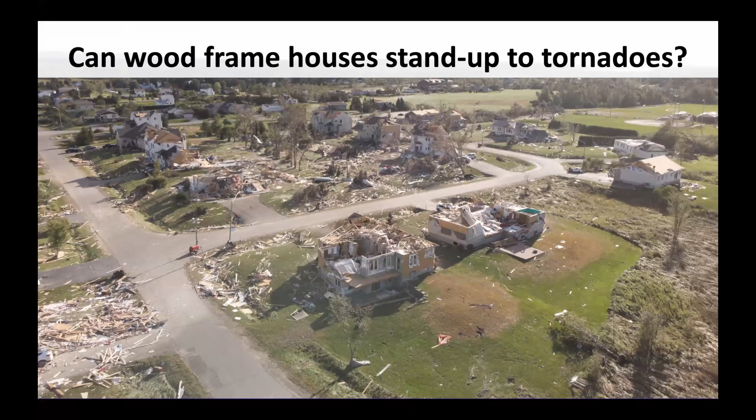So I'm going to talk about the vulnerability of houses to extreme winds and tornadoes. And to do that, I'm going to talk first about the EF scale. So tornadoes are rated by the damage that they cause. The wind speeds in tornadoes are seldom measured. We have radar systems in place, but they have volumes that are too large to measure wind speeds. So you really have to be chasing storms with things like radar to capture wind speeds. And even then, it's very difficult to get wind speeds down below 10 meters where houses are.

And so for a long time, we've been rating the wind speeds and the intensity of the tornadoes by the damage that they cause. And so we have the EF scale. EF0 is at the onset of damage. You get very minor damage. It starts at around 90 kilometers an hour, gust speeds. And this might take your eaves troughs off, might take a few shingles off, throw lawn furniture and trampolines around and things like that.

And then at the most extreme end, the biggest and most devastating kind of tornadoes are rated EF5, and those are estimated to have wind speeds above 315 kilometers an hour. Although one hesitates to have three significant digits in that number because, again, these are estimates and not direct measurements. But the damage caused is observable and can be categorized from light damage through moderate damage to severe and incredible. And so that's what the ratings are really based on.

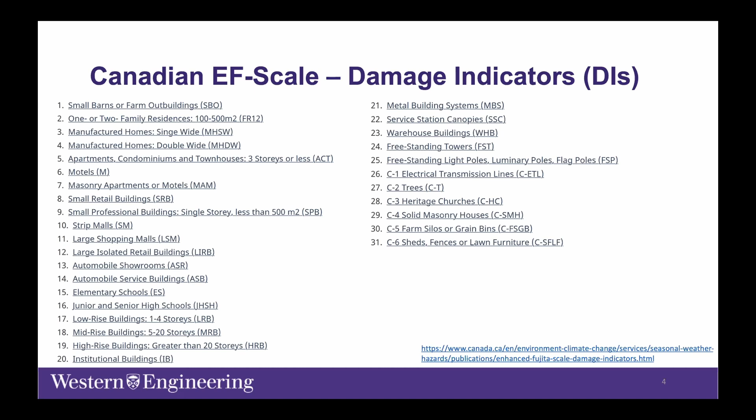So in Canada, we have the enhanced Fujita scale. We have 31 indicators, and one of them is wood frame houses, but we use all sorts of structures to rate damage, including forests and trees, and basically every kind of structure you can imagine to help us estimate the intensity of the tornado damage. And if the tornado hits nothing, if it's just going over an open field, the rating is EFU by default because nothing was hit. So it's important to keep that in mind. Of course, today we want to talk about wood frame houses, and the EF scale is very helpful in helping us understand the damage that's caused.

So there's 10 degrees of damage, starting at the threshold of visible damage. Again, these are things like your eaves troughs and shingles coming off, through to degree of damage 10, which is the complete destruction of a house, and the slab swept clean. So literally everything is blown away, and all you have is a concrete base remaining at the end. And in between, there's a gradual increase in the damage levels and the wind speeds associated with it.

Now, these wind speeds associated with the tornado, again, come from engineering assessment of that damage. And the one that's being studied perhaps the most, because it's really of critical importance, is DOD6, when large sections of the roof are removed. And that's being well analyzed.

And so these wind speeds are established, and the expected value, kind of a median value or an average value expected for lifting a roof off of a house, is around 195 kilometers an hour. If there's missing fasteners or some other inadequacy, we would rate it at a lower wind speed. And if there's some enhancements or things like a hip roof that make a house stronger, we have an increased speed. And so that's how tornadoes are rated.

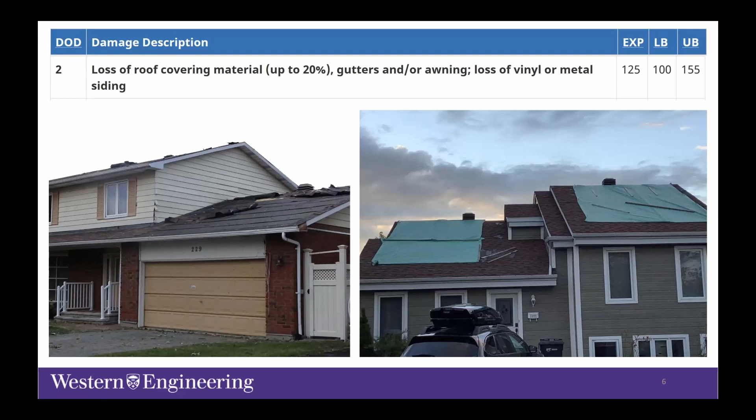What I want to do is talk a little bit about the vulnerability to houses and help you understand what the particular issues are. So when the wind blows over a house, it creates pressure. So we were talking about the degrees of damage at DOD2. Again, we have the uplift on the roof. At these lower wind speeds, you start to get the onset of damage. Shingles come off. You see vinyl siding. You see so much vinyl siding in a windstorm, our eyes actually start to ignore it because it's everywhere. It just comes off at very low wind speeds. And so that's DOD2.

As the wind in the tornado increases, of course, there's more damage caused, and the next level of damage is really the loss of the roof decking. So the roof is really the most vulnerable part of a house, and we need to hold things down. The shingles are gone, and then sheathing is off. You can see that in these images. The other part that you're seeing here, in addition to the roof sheathing being off, is a lot of windborne debris. Windborne debris is a really big issue in all windstorms, but it's a particularly large issue in tornadoes. When a shingle leaves the roof and there's enough wind for it to fly, it has enough energy to break window glass. And so you start to get a lot of secondary damage once the roofing starts to fail.

Sheathing panels will travel at close to the gust wind speed that caused their failure. So if you have winds of 120, 130 kilometers an hour, sheathing can travel at those kind of speeds. So you can see that would be both quite frightening, but also very damaging. And so holding these things in place becomes really important.

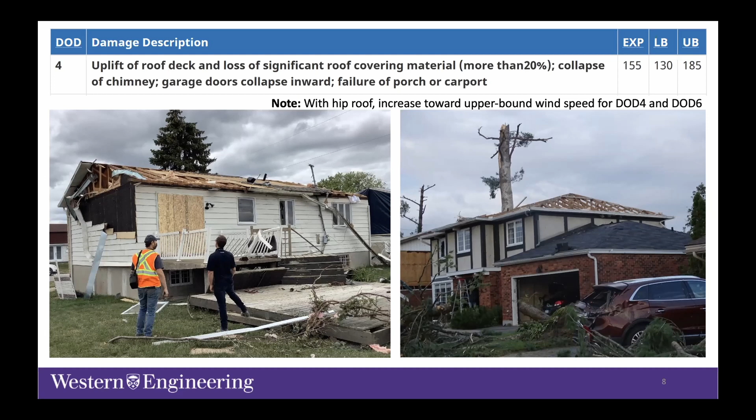The next level of damage is DOD6. This is when the whole roof comes off. There's been quite a lot of analysis of this because it's a critical failure. At this point, the houses are usually condemned and have to be rebuilt, usually from the ground up. So the loss at this stage is really 100% for these kind of properties. Below this kind of level, repairs can happen. So this is where we really want to focus. As I said earlier, this wind speed is in the EF2 range, and 95% of the tornadoes are in that range. So this is what we really want to focus on, because this is where the major damage is caused.

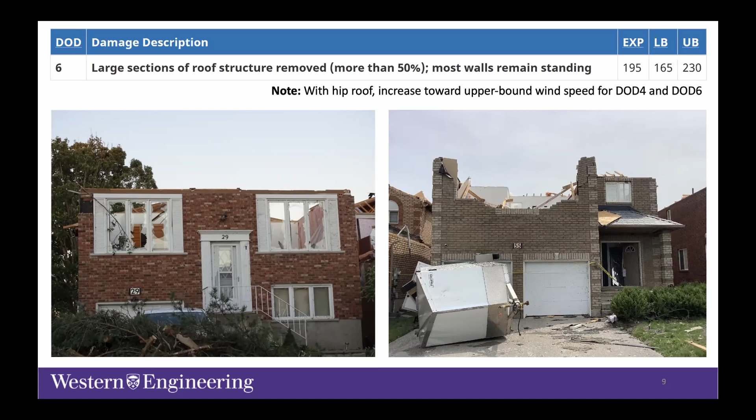If you look at these images too, again, I talked about the debris breaking windows. You can see in the image on the left, all the windows are broken. In the image on the right, there was a window above the garage, and that's gone, and the whole roof is gone. What usually happens is you get a debris impact, the wind rushes into that space, and it causes a positive pressure. It's like a balloon blowing up inside your house, and that gets combined with the aerodynamic pressures on the outer surface that want to lift the roof, and these act together to push the roof up and over. And so this is one of the major things that we want to mitigate.

Rob and Michael are going to talk about some resilience measures, but really the short answer is putting in hurricane straps can help withstand this right up to this kind of level of wind speed to mitigate the damage. Garage doors are also critical. The broken windows, of course, cause internal pressures, but garages also cause damage.

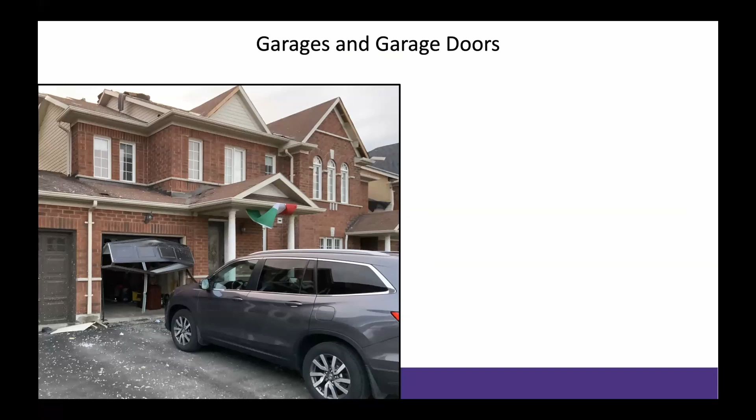This is an image from Barrie where a garage door got sucked out. And that doesn't add to the vulnerability of the roof. It is an interesting photo. The more serious case is when the garage door blows in or gets hit by debris, and this pressurizes the space. In this particular case, we had 2 stories and internal drywall, so it didn't push the roof off. The damage above this house was caused by the failure of both the roof and then upper walls. And the sidewall, in this case, blew out because of the garage door failure.

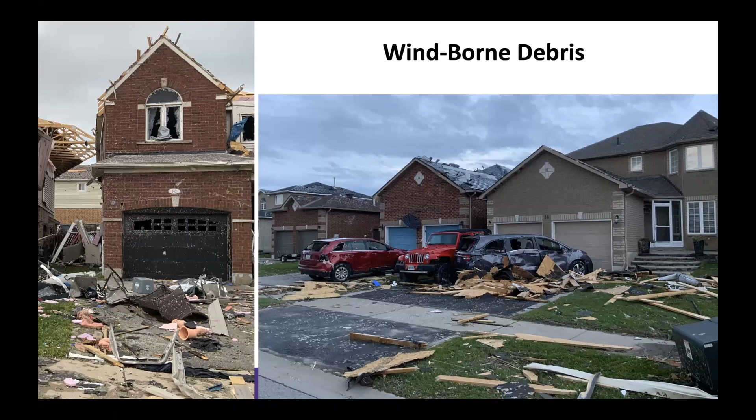So debris, again, I want to emphasize that is really an important point. So holding as much of the structure together to reduce the debris field is really a significant issue. And once you start losing complete roofs at DOD 6, that is when you start to see a lot of damage in adjacent structures and a real mess after the storm.

At the next level, once the roof fails, the walls are very vulnerable and they can collapse. And so this is the next level of damage. It takes a bit more wind speed to do that. So it's actually a higher wind speed at DOD 7, but that's where this house on the left occurred. The house on the right was from Dunrobin, and here the first floor collapsed. There was a second floor. There's a lot of wall damage again, so this was categorized as degree of damage 7 with the wall collapses.

And again, lots of details here on how to hold the houses together. We see lots of different things with how houses are put together, but if we have wall sheathing, it really helps with this vertical load path that we talk about. So the wind wants to lift the roof up, and we want to hold it down by having proper fasteners, but we need to take that load then all the way down to the foundation, and sheathing can really help with that by holding the first story to the second story and the first story to the foundation.

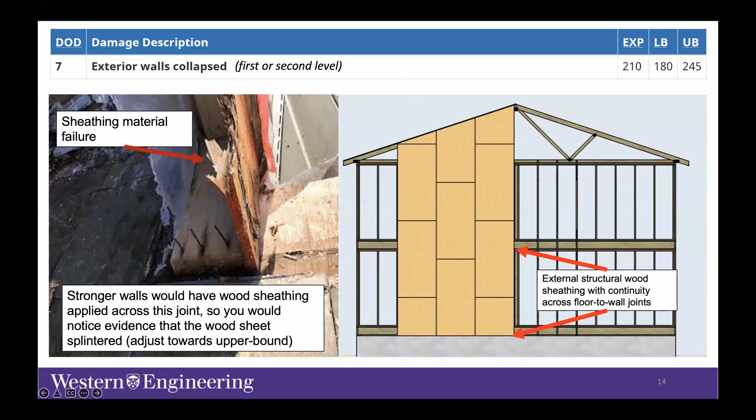And here you see a case of broken lumber on the left because it was properly fastened there. There was some wall failure there that you can see, but this is definitely making a house stronger and holding it together. So again, little details matter here.

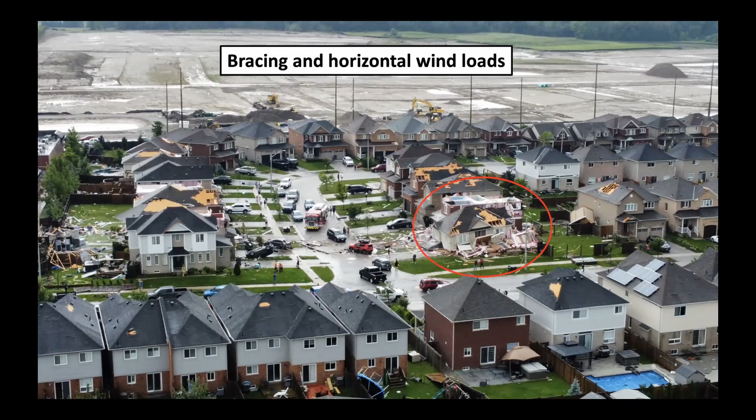I want to talk about one particular case in Barrie that was quite interesting to us. It was this house in the middle that collapsed. So we see out of sequence failures here. You can see there's shingles off. There's a couple of sheathing panels off, and then it looks like it's just sitting there off its foundation, but it was a 2-story house. It looked like this, and the first story collapsed. And so this is kind of an unusual failure for us, and we think it's something that needs to be addressed in modern building codes.

So this form of construction had lots of insulation, but no sheathing, and the bracing wasn't sufficient to hold it over. And so you get an out of sequence failure of the walls collapsing before the roof comes off. And so that tells us we have a weak spot there that we need to think about in terms of mitigating damage. So this is the kind of exception to thinking about holding the roof down. We also need to make sure that we don't lose sight of enough bracing to hold it together.

Finally, at degree of damage 10, this is when the house is completely destroyed and the wind is strong enough it blows everything away. What holds your house down here is anchor bolts with a washer and nut, and when that's done, your house is very strong, and this is really good for up to EF2, probably EF3 tornadoes. But at EF5, it just overwhelms the structure and can cause it to fail.

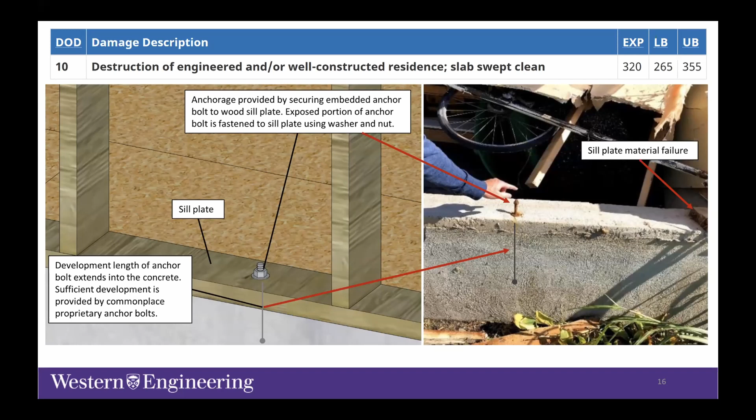So this is one of the things that we look for in these surveys. In these two cases, these are degree of damage 10. The house is completely blown away. The house on the left was from the Alonsa EF4 rated tornado.

But there were places here where the foundation bolts were very weak, and we had joists just sitting on concrete. On the right, you can see some nails into concrete. That's a pretty poor fastening method rather than having embedded bolts. At this level of destruction, at this level of wind speed, we're not suggesting that we design for that, but the little details do matter, and they can help hold things in place for longer and provide more safety.

So just again, to end my part of this talk, 95% of all tornadoes are roughly EF2 or less, and we can do things about that kind of damage. At this level of intensity of tornado, we have degree of damage 6, which is really about the roof failing. And so making sure that we hold the roof on is the major structural action that we can do. Putting things in place to reduce the windborne debris field as well.

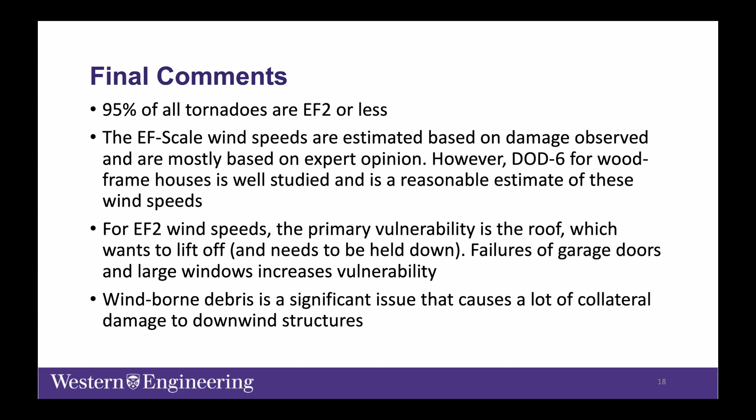So keeping the sheathing on, keeping the shingles on, we can all reduce that kind of damage by taking things out of the debris wind field. And so I'll stop with that and let my colleagues take over.

Okay, so my portion of the presentation is going to follow on what Greg has said, and it really talks about the experience we had in Barrie and what we're trying to do about it so that we can make these houses more resilient. So just a bit of an agenda: slight introduction, what exactly happened in Barrie, what is the problem, how do we think we can solve that problem, and then how can we change the code specifically to deal with those issues.

So just quickly, a little bit about myself. I'm the Chief Building Official for the City of Barrie. I've been a structural engineer since 1987. I've worked in both private consulting and the public sector. I've had some involvement in some technical committees, and I know some of these people through some of those committees. And I previously chaired building code committees, the structure advisory committee, or building code interpretation committee. So most of my career has been related to building code stuff, but specifically with the view of the structural requirements.

So on July the 15th, an EF2 tornado hit Barrie. I have never experienced a tornado before, and I can tell you it was quite overwhelming. I remember I was sitting at home, and some of my staff, some of the building inspectors were in the area, and they said, "Michael, we think there's something going on here." And they sent me a couple of pictures, and I thought, oh, well, that doesn't look too bad. And then they sent me a few more pictures, and then I made my way to the site, and it was actually completely overwhelming. Not only the amount of destruction and the amount of roofs that were ripped off was incredible, but also the amount of debris.

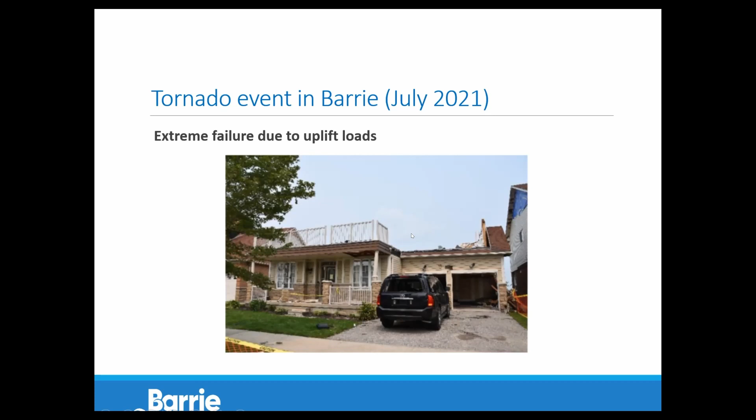So this is one example of what we saw in Barrie. This is one of the worst houses that was hit. This used to be a 2-story house with a roof. So not only was the roof ripped off, the entire second floor was ripped off. We did issue an unsafe order and a demolition permit for this house, and it's being completely rebuilt. So this would be an example of what I would call uplift loads. Anytime the roof is getting ripped off, obviously something is pulling up on it, and those are some of the forces created by the tornado. And that's probably the most common type of damage that we saw during the tornado.

It's not coincidental that this house is on a corner lot. Most houses on corner lots have more windows in the sidewalls that face the street than houses that are not on corner lots. And there's a reason for that in the building code. It's called spatial separation. So the building code limits the amount of openings you can have in a building in case there's a fire and they want to prevent fire spreading to an adjacent property. In the case of a corner lot where there is no adjacent property, you can take advantage of that and have far more windows. What that does, though, is it eliminates portions of wall that help stabilize the building.

So in this case, Greg had also suggested that there was no sheathing on this house. They had used insulation on the outside and no sheathing, but they did have some bracing, and the code does permit you to do that. So that was certainly a significant contributing factor. But the other reason is because it had a lot of windows and it just didn't have enough wall remaining to be able to stand up. And in this case, the wind pushed the house over rather than lifting it. Or there was probably a combination of those loads as well.

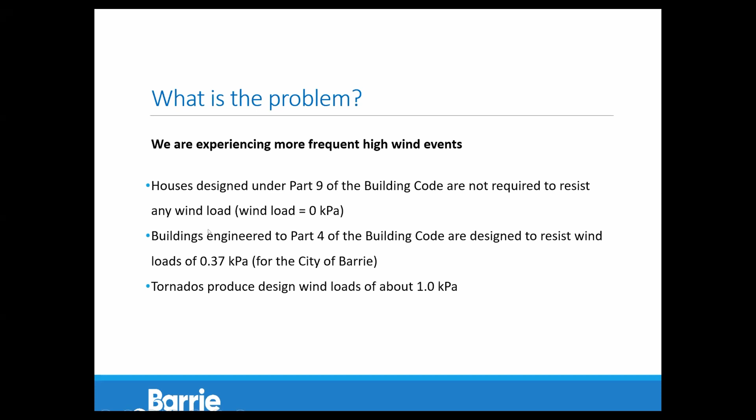Now, the actual loads from our tornado are higher than this because we apply all kinds of pressure coefficients due to the geometry of the house. There's higher loads in corners, there's higher loads at overhangs, but the base load for comparison purposes is 1 kPa. So this is why we have a problem.

We are experiencing more frequent high wind events. This tornado in Barrie was in July, and there was a tornado in Barrie previous to that. It was 36 years ago. But there are many, many tornadoes occurring in Ontario. So the design loads, that 0.37 kPa that I showed you on the previous slide, represents a load with a 1 in 50 year return period. That means that load should only be exceeded once every 50 years. Yet last year in Ontario, there were 60 tornadoes. They weren't all EF2 tornadoes, but a tornado will significantly exceed those loading requirements.

So the real question here is, does the code need to reassess the wind loads for which buildings are designed? So Part 9, which is prescriptive, has historically worked fairly well, but as we see more high wind events, really this is the most important question that we have to address.

So what is the solution? Greg has studied tornadoes, so we understand and can quantify the loads that are created by tornadoes. And we can certainly design buildings to resist those loads. So once we know that a tornado creates a load of 1 kPa, it's easy for structural engineers to take those loads and design the buildings. So what we need to do is we need to change the framework of the code to design buildings for these higher winds.

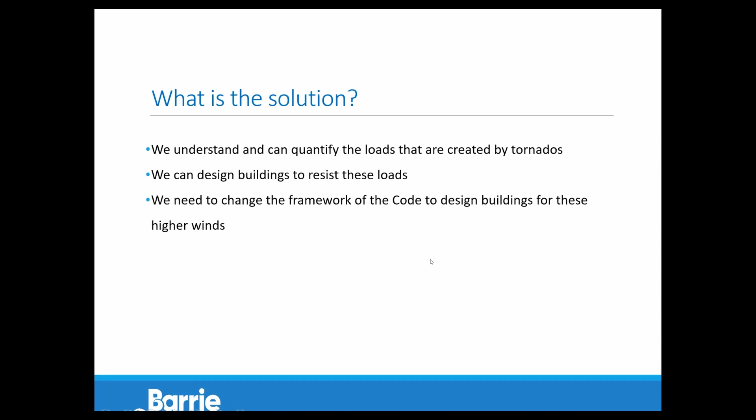So as I said previously, houses are currently designed under Part 9 of the Building Code, which is a prescriptive standard. So it's exactly like a cookbook. Just do what it says and your building will comply with the code. Although there are no wind load requirements, buildings are deemed to be structurally compliant with the code. And again, Part 9 is based on successful past performance, but not performance against these high wind events. So as these high wind events increase, can we continue to rely on the past performance of Part 9?

We can create prescriptive solutions within Part 9 to withstand the higher loading requirements created by the high wind events. So we could change all the wind loads. We could say that every house has to be engineered, or we could say, we know how much load there is in these high wind events, and we can prescribe solutions and put them in Part 9 so that they can be incorporated into residential house construction. And that's what I have proposed to the province.

So this is not a technical presentation; I'm going to go over on a very high level the specific things that I've suggested for code change proposals. So one main concept is the concept of a continuous load path. As we see the roofs ripped off in the tornadoes, Greg mentioned the critical joint between the roof and the wall, and that is probably the most critical joint, but there are many other joints that uplift load. So if someone's trying to rip your roof off, those loads have to be transferred all the way down to the foundation of the building. So we want to do that by identifying a continuous load path. So one of the things I've suggested is to provide clarity that buildings must have a continuous load path from the roof to the foundation to resist uplift loads.

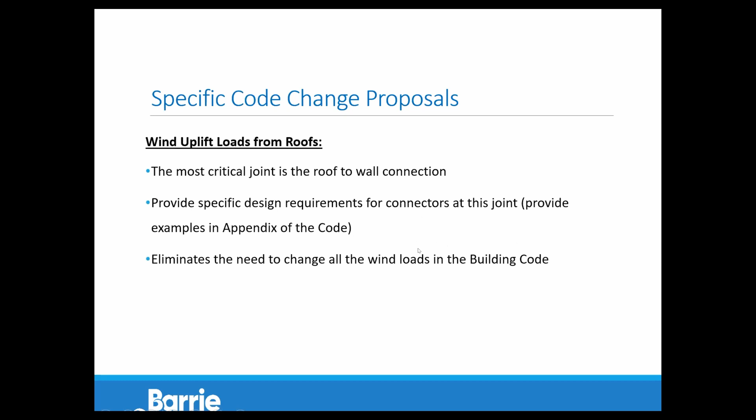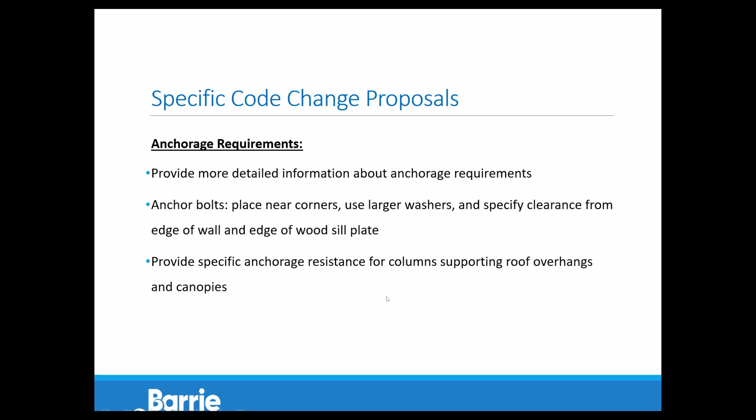And that's it. So really high level, just the continuous load path. Let's look at that most critical joint. Let's focus on the sheathing placement and the connections and make sure we anchor our walls into our foundations. And Robert, I guess I'll pass it to you.

Good. All right. Well, thank you, Michael and Greg. So I'm the third speaker here in this panel, the third and last. And my job today is to describe a soon to be published CSA standard S520.

And the dilemma I had was that I was not allowed yet to show images or specifics from the standard. So I felt a little handcuffed there, but I'm going to explain the standard anyways, but I'm going to do it in a maybe more pictorial way by showing images from my experience in Dunrobin, which was a tornado that happened in 2018. And I've updated it with a few images just recently near my house from the derecho that happened last week.

So the standard that I'm going to be describing is called CSA S520. It's going to be published in July, and the full name of that is Design and Construction of Low-Rise Residential and Small Buildings to Resist High Wind. It's a nice long name. And Greg and others at ICLR were involved in this standard as well.

So my experience from the Dunrobin tornado, it was mostly an EF2. There were pockets, I understand from Greg and his team, of EF3 level tornadoes. And I had the opportunity to walk through those houses with the City of Ottawa, very fortunate to be able to do that in September 2018.

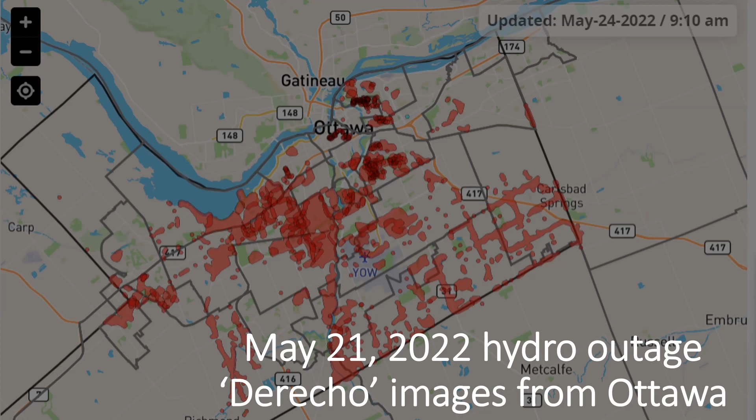And as of today, some of the major roads in Ottawa still have hydro poles lying on the road. And I'm happy, though, to report that my power was restored finally this morning at 1:30, just in time for this presentation after about 128 hours without power.

And this is what it looked like just outside the window behind me, less than a kilometer away. This is what happened. And I don't have the experience that Greg has of looking at all these observations, but it perplexed me to see things like this left-hand image where what's typically a flimsy sign is standing stoically there beside much stronger structures, the hydro pole and the traffic light system.

They're both out. Of course, it all depends on the wind direction, and that sign was probably in the perfect position to let the wind pass it by, but the other ones were not. I'm not going to talk too much about that. That was just a little update, and I have a few more derecho images that illustrate points. But my main goal today is to really describe this new standard S520 and to illustrate 10 points about how to build wind resilient buildings using this standard.

This standard, as Michael alluded to, is based on EF2 tornadoes. And as Greg mentioned, EF2 tornadoes are what the majority of tornadoes are in Canada and the US, 95% of them. And those represent wind speeds of around 180 to 220 kilometers per hour. But before you tune out on why we would want to apply this to wood frame buildings, the principles in the S520 do apply to lower wind speeds as well. So that's the beauty of this. And really, I treat this standard as a standard of how to increase the resiliency of wood frame homes.

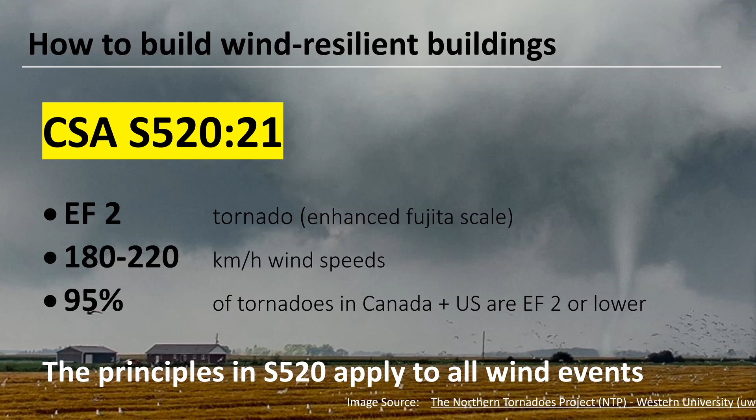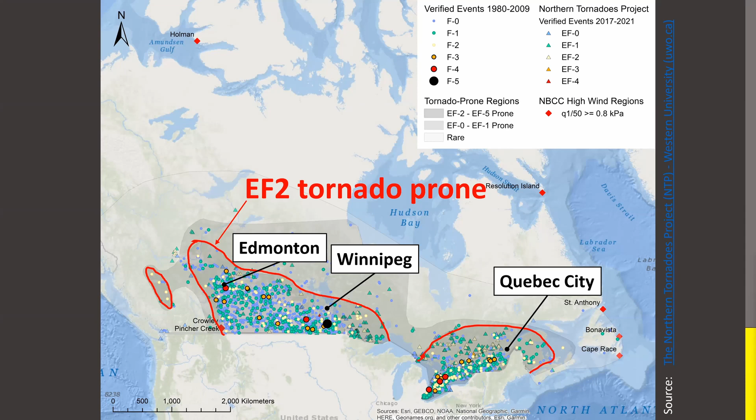Also, a map from Greg and his team at the Northern Tornadoes Project. The city descriptions and the red lines are mine, but those are showing the EF2 tornado prone areas. And so when we think we're not going to get EF2 tornadoes in our area, well, we certainly can. And you can see how far north tornadoes of this magnitude are. So now we'll get into the 10 features of the standard and how we can apply that to building.

One of the most important principles included in the CSA standard is attaching the roof sheathing really well. Of course, if that roof sheathing is gone, you're in trouble. And Greg already illustrated that once the roof sheathing is gone, everything becomes more susceptible. The standard will describe wind pressures, which I can't specify now, but I can say that the roof edges and corners, projections, experience the highest wind pressures. And so the standard addresses that.

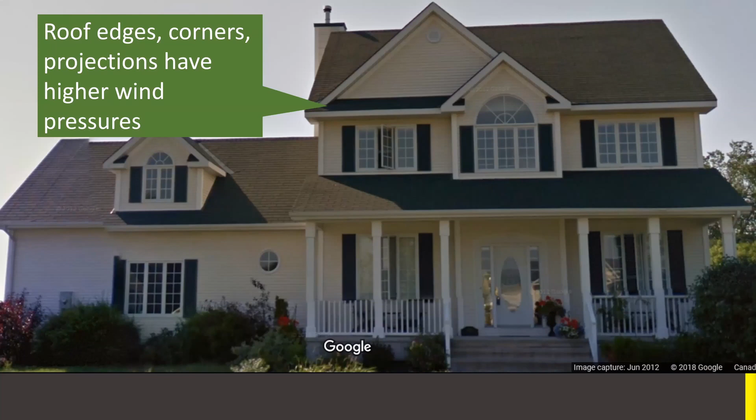So the good news is back in 2018 in the US, the wind resistance values went up, and they introduced a new nail called the roof sheathing ring shank nail. And this nail hopefully will make it into Canada to be more commonly available.

This nail is important because it acts like a screw with its holding power, but it's driven in like a nail. And so now the failure doesn't become that nail pulling out, but it actually becomes the sheathing popping around the head. And we call that head pull through governing the design. So that's the beauty of this nail.

And so the standard will have tables about how to fasten your roof sheathing with this type of nail, but also common nails. And so the advantage will be you could use less of these types of nails than common nails. So that's principle number one, feature number one.

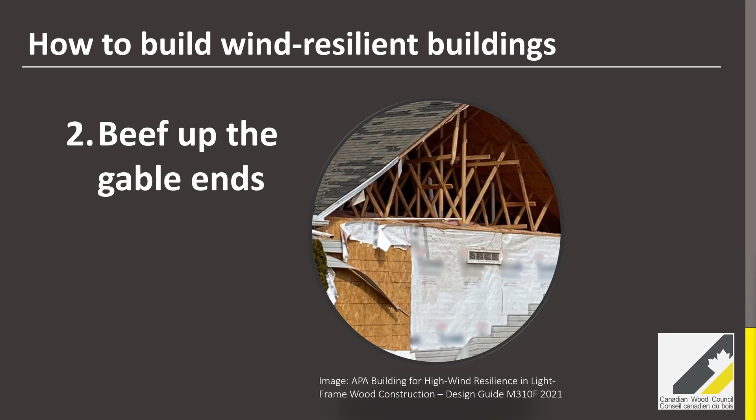Two, beefing up the gable ends. The standard talks about this extensively because this is a known issue. Typically what you'll see on a wind site after the wind event goes through, you'll see damage to gable ends. There are high winds up there, no doubt, but often they're less structurally sheathed. They're not going to have gypsum wallboard on the inside. They may have less fastening. And so for a number of reasons, they're susceptible.

And so the standard will describe methods of more strongly attaching the studs and the overhangs to resist those wind loads. Also, Greg or Michael pointed out, I forget who, that hip roofs perform better than gable roofs. So one way to prevent the gable roof failure is to build a hip roof.

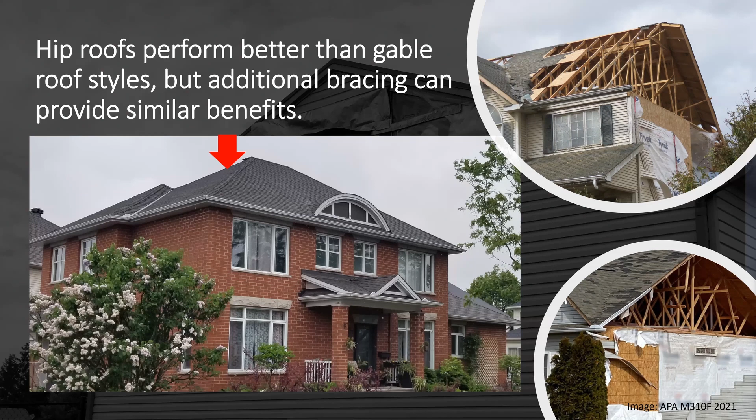This is my neighbor across the street's house. And so that makes me happy because at least I won't have chunks of their roof flying at my house, at least based on their roof structure.

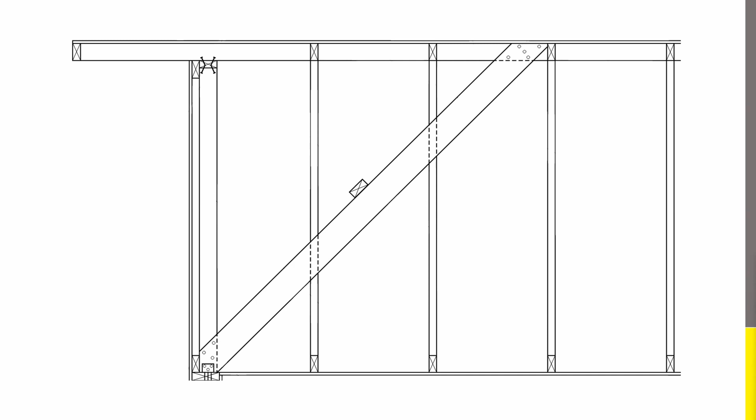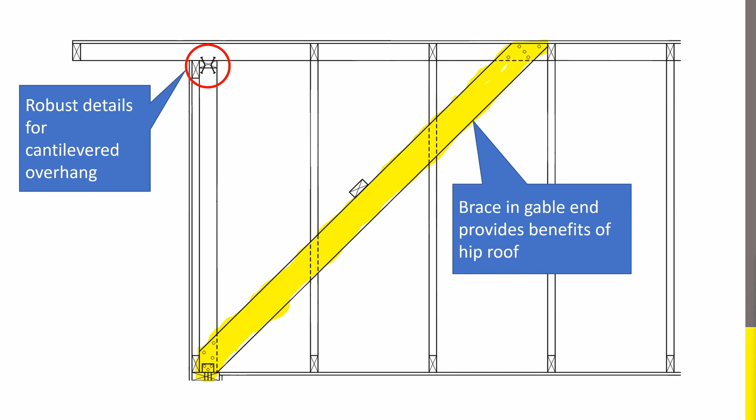The standard addresses that, knowing, of course, that not everybody can build hip roofs, but it kind of mimics it by adding these diagonal members in your gable end, if you do have a gable end, and it'll describe in a lot of detail the spacing of these proposed braces, the attachment of them on the bottom and the top, as well as robust detailing for the overhang at the top and the connections at the bottom for those gable end studs.

So that's a very practical and useful aspect of the S520 standard that you can look forward to reading about in July when it's published or earlier.

Principle number 3 is connecting the upper roof framing and components to the lower framing more robustly. And so this includes things like piggyback trusses. That's a case where you have a tall truss and you have what they call in the industry a cap frame that attaches to a lower frame. And the connection of that is detailed in the standard.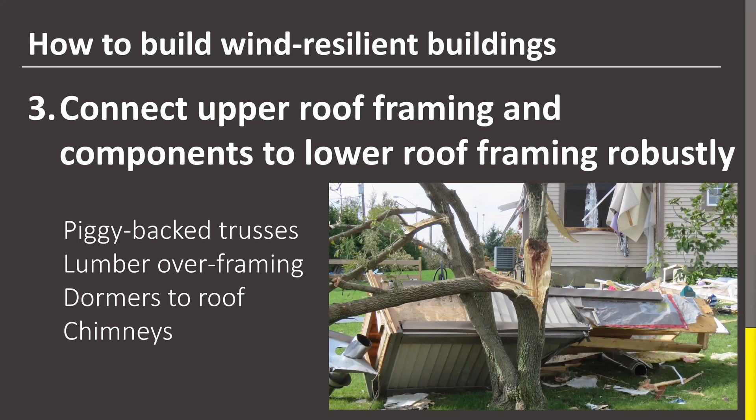Also the connection of lumber over framing, things like crickets or other aspects of your roof, little pieces of dormers or dormers themselves and chimneys, all of those should be connected more strongly. Here's an example of a chimney in the Dunrobin storm that used to be on that house in the background, but is not anymore.

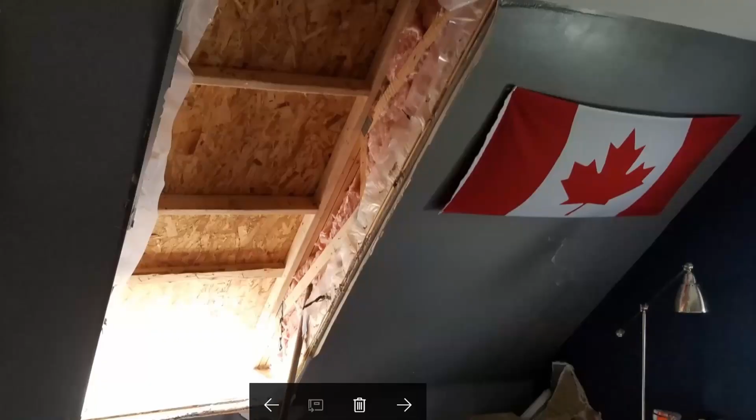And here's an example of a dormer that blew away, and they just put some temporary sheeting over top of it to prevent further damage. Here's a case where the dormer is now located where the car used to be. So the standard does point out that you need to attach these types of features more strongly.

Okay, so now I'm on point 4, feature 4 of 10 features of how to build wind resilient buildings. And so the fourth one is ensuring that, just like we want to ensure the roof sheathing is adequately attached, we want to ensure the wall sheathing is adequately attached for suction in this particular case.

And just like with roofs, where the corners and edges and ridge have higher wind pressures, similarly with bump outs and corners of walls. And so this is a house near my house, a result of the derecho that happened last week. And you can see the corner there was the only part of the wall that was damaged. And that's more than likely because there was just a little bit increased wind pressure at that area.

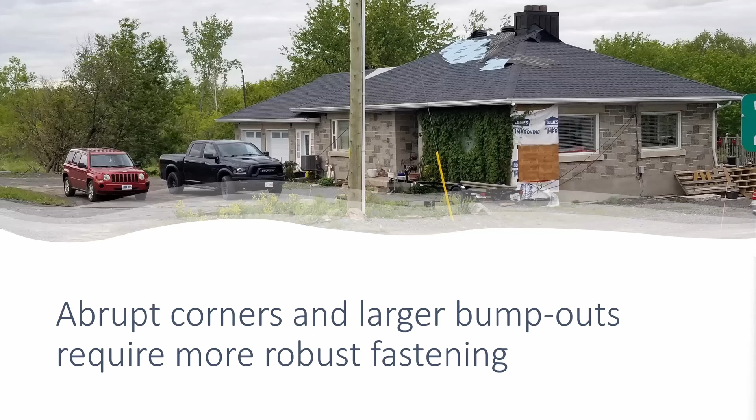The Rideau River is right behind that house, but the wind came from the front of the house towards the back, towards the river. So it wasn't a river effect.

Principle number 5: both Greg and Michael pointed out the racking, the lack of sheathing to prevent lateral movement. And here's an obvious case where the building racked. There's a few of them here in Ottawa that have racked as well.

The standard S520, instead of duplicating what the National Building Code requires for lateral movement or lateral resistance, refers to Part 9 of the National Building Code. I've been involved in that for about a decade. Although the provisions are in there now, they're going to be even more improved in the 2025 National Building Code. I realize the 2020 was just published. We didn't quite make it in there, but still, using and referring to Part 9 to make sure that you can comply with at least that is useful.

And those of you in Ontario, you'll see there is not a specific section as there is in the National Building Code for this. So you'd have to look at the National Building Code 9.23.13 for how to resist lateral loads. And remember that the 2020 National Building Code, just published in March of 2022, is now freely available on the Codes Canada website. So you can take a look at that and see what I'm talking about in more detail.

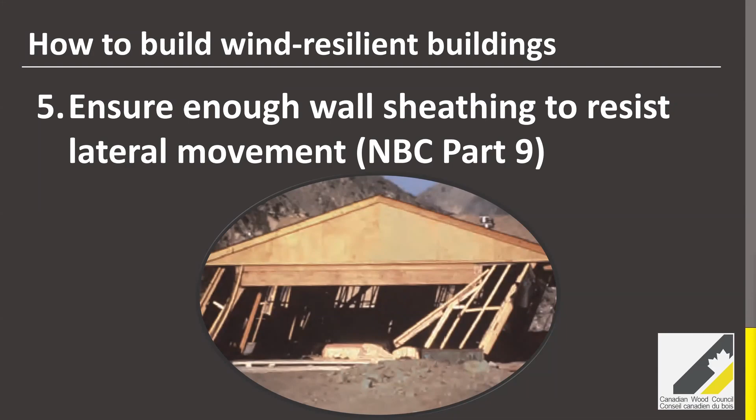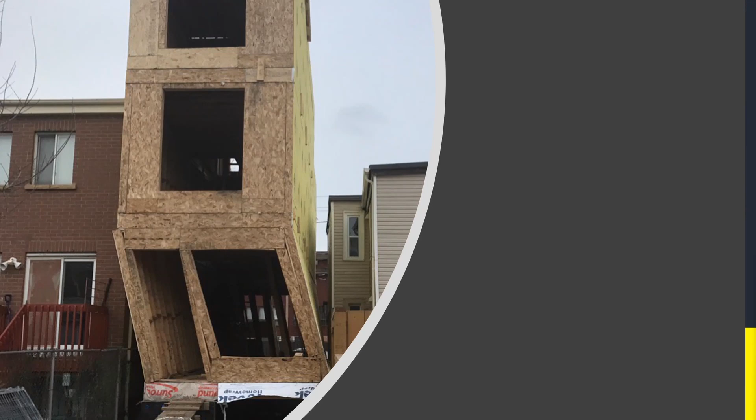So again, you need good sheathing, but you also need enough sheathing to resist those types of lateral loads. And this one, granted, it was during construction. Obviously, there's not enough wind resisting walls in that direction. Fortunately, the brown brick house beside it propped this one up until they could take it down. So we need enough sheathing for these types of houses.

Now, I recognize some people are a little concerned about mixing sheathing and continuous insulation, because we also have to consider the energy code these days and the demand for continuous insulation, but they do work well together. Some builders are using both, and some are just swapping out the wood sheathing, relying on the gypsum wallboard and putting in continuous insulation. But we highly recommend using the wood sheathing, and S520 demands that you use the wood sheathing for lateral reasons, but also, as Michael already pointed out, for uplift reasons.

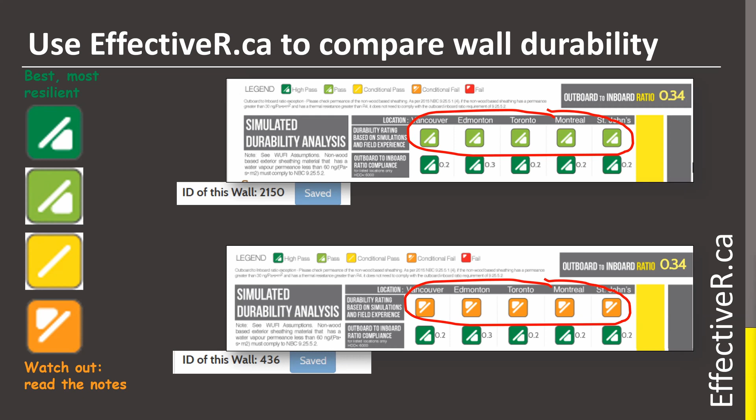What I'm showing here on the screen is a tool that the Canadian Wood Council has built that allows you to compare wall durabilities. It's a free tool available at cwc.ca under the design tools, or get there more directly by typing in effectiver.ca. It gives you a combination of 16,000 different wall types, and you can compare the durability of walls. You can see there's many cases where you can use continuous insulation with wood sheathing on the outside, and they are considered very durable walls.

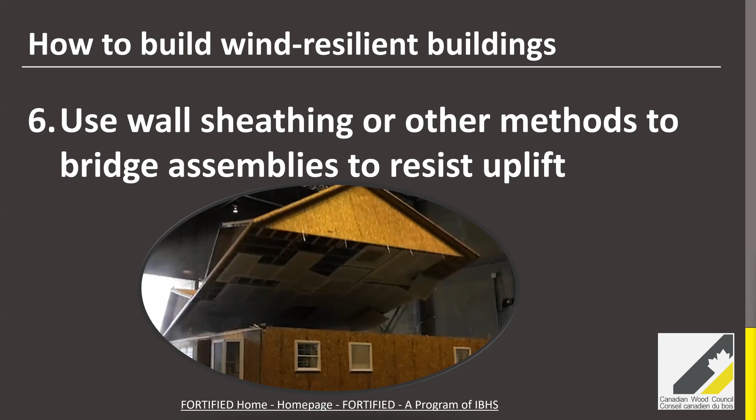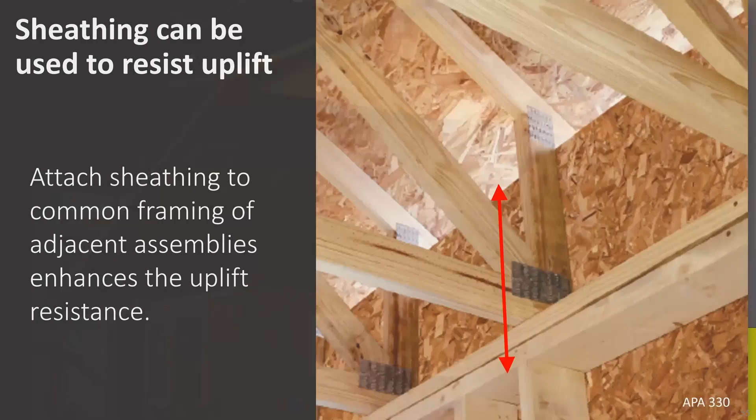Now we're getting back into the 10 features of building a resilient home. We're now on to item 6, using wall sheathing. Michael alluded to this from his Barrie perspective: using wall sheathing or other methods to bridge assemblies, particularly the roof, down to the foundation. You can do that with straps or by using the wood sheathing to bridge those assemblies. And I'll talk about that in more detail.

So in this case, it seems pretty easy to attach the wood sheathing to the heel of this highly energy efficient truss, down past the plates and to the studs below it. That's what we mean by bridging the assemblies. So instead of relying on discrete sheathing, bridging the assemblies with sheathing.

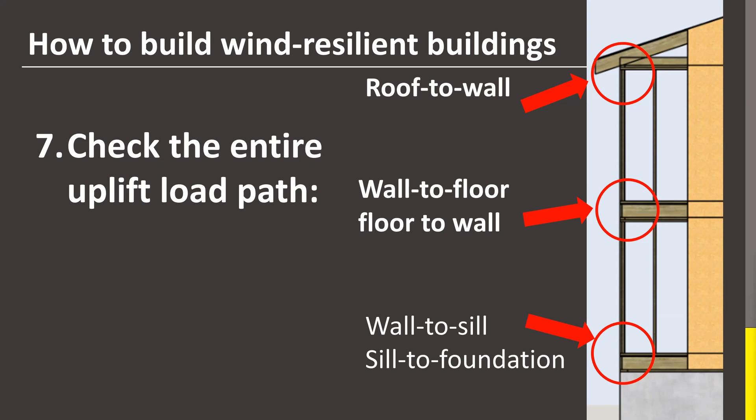That brings us to a very related point, number 7: checking not only the roof connection, but the entire uplift load path. I'm going to spend a few more minutes on this than the other sections. We're going to talk about the roof to wall, the wall to floor, the floor to wall, the wall to sill, and the sill to foundation.

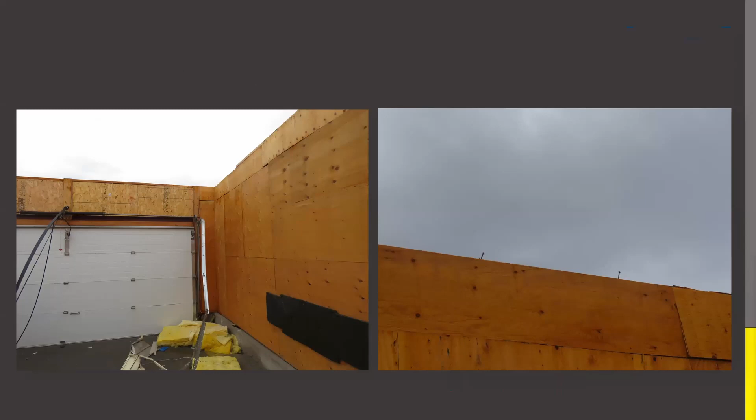We talked to the homeowners, and then we realized that the homeowner had put wood sheathing on the inside and the outside. So those walls were pretty strong, and that's why the walls stayed up. The reason why the roof left, you can barely see it, but there's some single nails poking out here.

Let's see here. Right here, you can see the nails, and that's one toenail. Greg mentioned the building code and how there's 3 toenails that are required, and that's a code item. You can see the National Building Code, Ontario Building Code has the same provisions. It's saying that when you have rafters or roof framing, you need to toenail each of them with 3 of those nails.

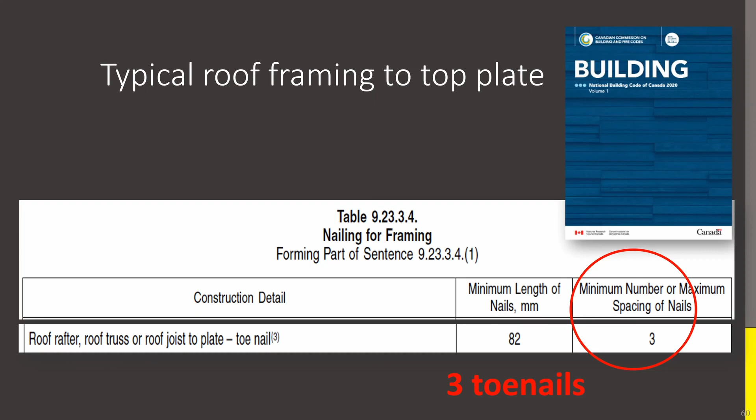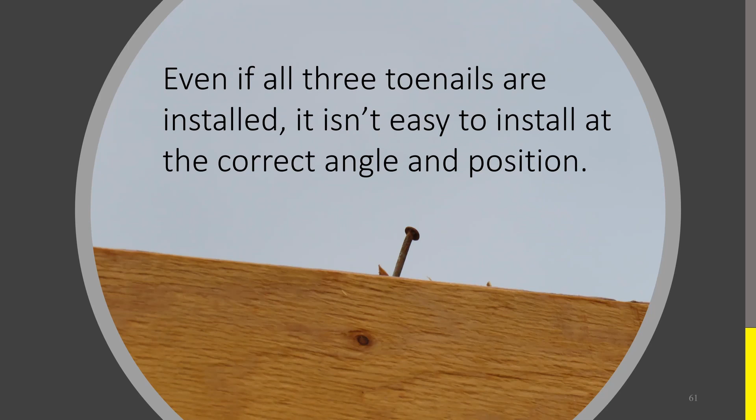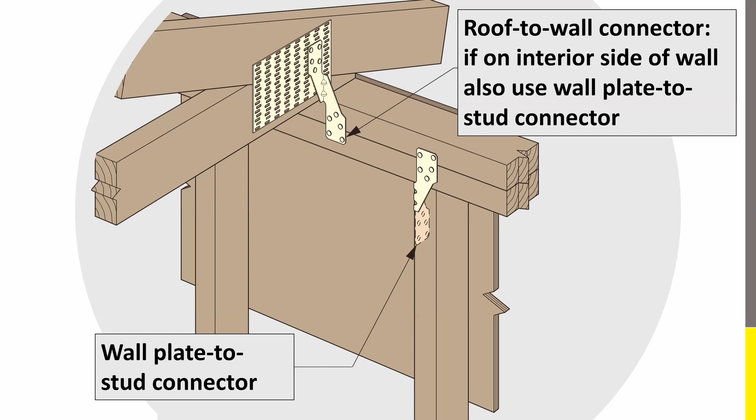Hurricane straps or hurricane screws can be used to also attach the roof framing, at least to the top plates, really adequately. And what we did want to point out, though, and what the standard will point out, this doesn't come directly from the standard, but this is pointing out that when you have the roof connector, if you're connecting that hurricane strap on the inside of the wall, you also have to have a wall plate to stud connector so that you don't have an eccentric load. So what I mean, I'll show you in 2 slides.

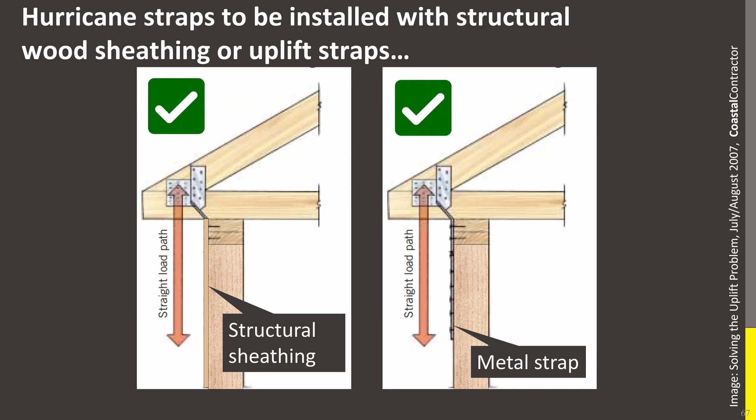In this slide, it's showing if you have the hurricane strap on the outside of the framing, that's fine. You just need to have a continuous load path that's not eccentric. So that could be the hurricane strap attached to the top plates, and then the top plates are fastened with the sheathing all the way down, or you could have a continuous metal strap, as long as it's on the same side.

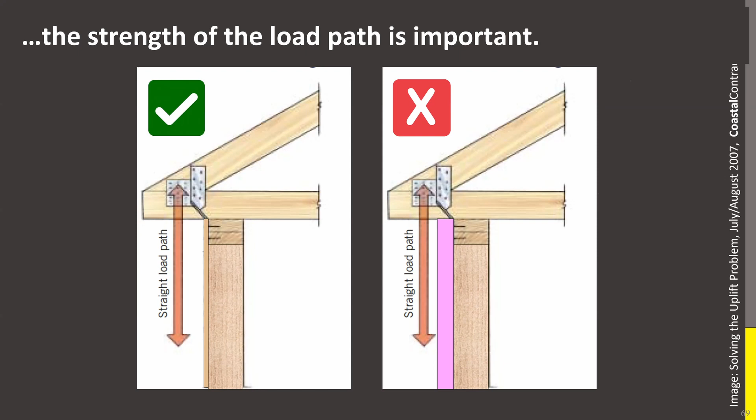And of course, the strength of that load path is important. The wood sheathing or the metal straps, they're good, but if you skip that step and you have the pink or blue stuff on the outside, you need an alternative method to make sure that you have a straight load path that's strong enough to resist the uplift.

So here's another example of the wall down, and now I have some quick illustrations explaining what I mean. I'm not going to go through what each of these nails are, but the important point to grasp from these next slides is the direction of the fastening. And so you can see they all look good for resisting loads that are going from left to right or right to left, front to back. But when you're considering uplift, they're all in a position in which you can pull it out. And I think you might even know how easy it is to pull out a nail when you have a hammer. It can be fairly easy to pull those out. And so the wind with those powerful gusts can pull it out easily.

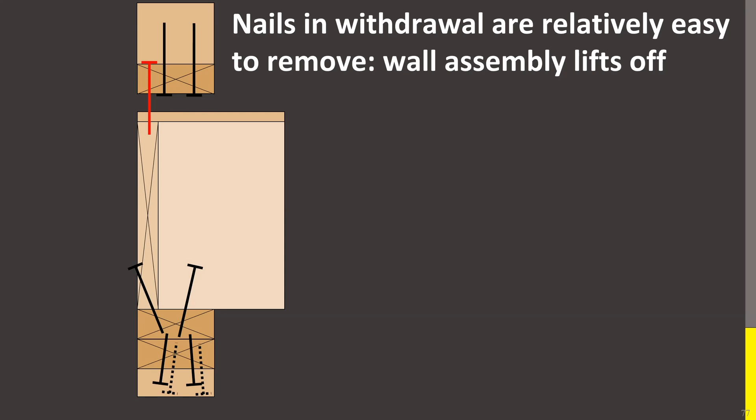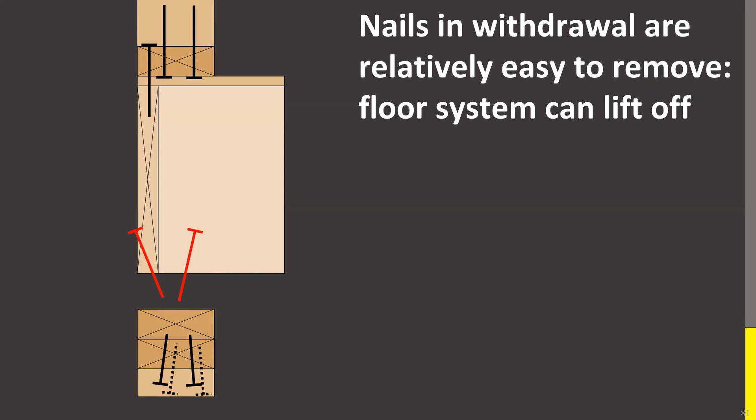So what I'm depicting here are some of the prescriptive code methods of fastening the framing. And as Michael pointed out, it's worked really well. The code works really well historically. It just doesn't quite cover the uplift satisfactorily. So again, it's relying on nails in withdrawal, and you can have a number of failures if you're relying on nails in withdrawal. You can see the whole wall can remove, like that one image where we showed just the floor remaining, or the studs themselves can just lift off, particularly susceptible because it's in the end grain of those studs, or the whole floor can lift off again because it's just nails in withdrawal.

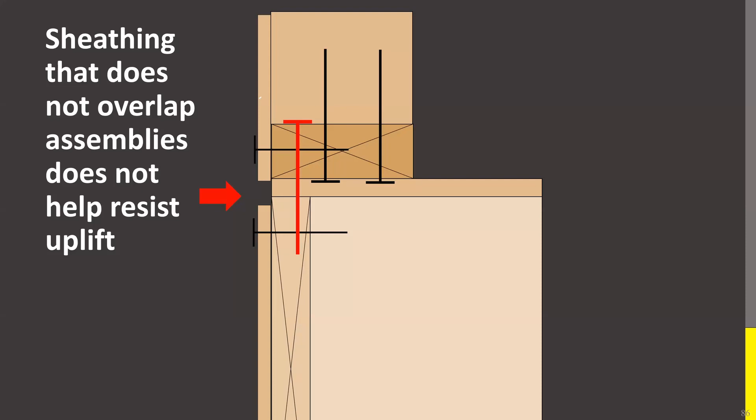Here's an example of a nicely wood sheathed building, but the sheathing is discontinuous at those assemblies. So you can see here that the sheathing does not overlap the assembly, and then we still have the same issue. The roof, the floor could lift off, or the walls can lift off. And so the standard, getting back to this S520 standard, outlines how you need to have a continuous wood sheathing or some strapping that bridges those assemblies.

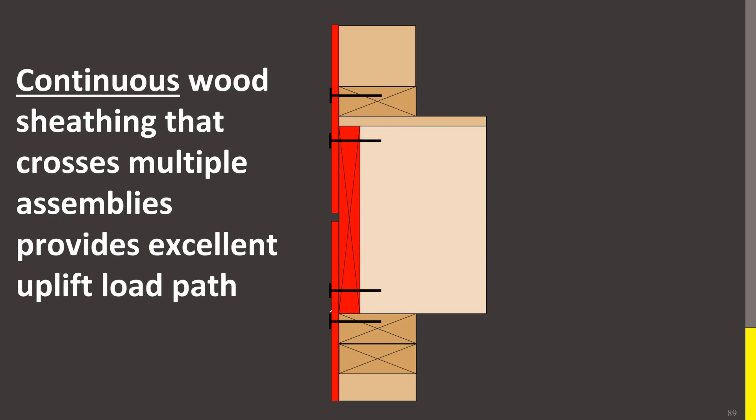And so here's an example of using the continuous wood sheathing that crosses those multiple assemblies, and that provides a really good path. The standard even gives a more robust detail in the event where you use things like lumber or LVL rim boards that are a little bit susceptible to splitting. Then it suggests reinforcing that with materials like another piece of plywood or LSL, something that's a little less susceptible to splitting, to bring your load path from top to bottom.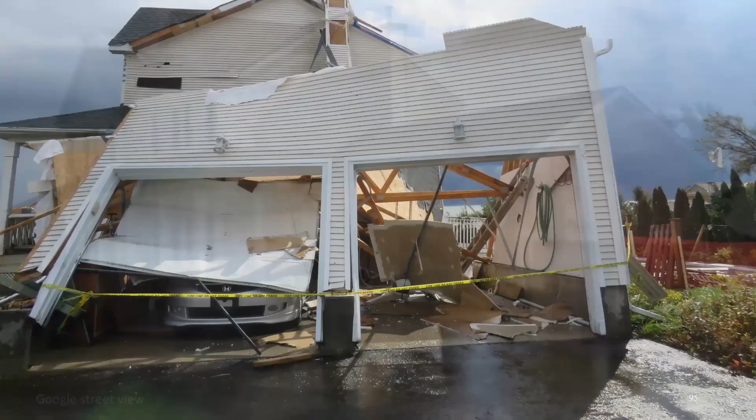And then finally, for this uplift load path, the sill to foundation detail is also really important, and in particular, the washer. So this was a Google map image of a house, again, Dunrobin, and that's what we saw when we got there. There's a number of failure mechanisms here, one of which is the garage door, as Greg pointed out earlier, getting pushed in. That's a big problem, and it's probably why the wall at the back punched out.

But what I wanted to focus on in this exact same garage is the fact that we didn't notice any washers. So it's hard to see maybe in that image, but trust me, there were no washers in that building. So they were either forgotten or they're very small and they're underneath that nut. But washers are important, and not only the code specified washers, which just say put a nut and washer, but CSA S520 will actually specify a much larger size washer for the anchor bolts. That will ensure that the sill plate does not lift off as your point of failure.

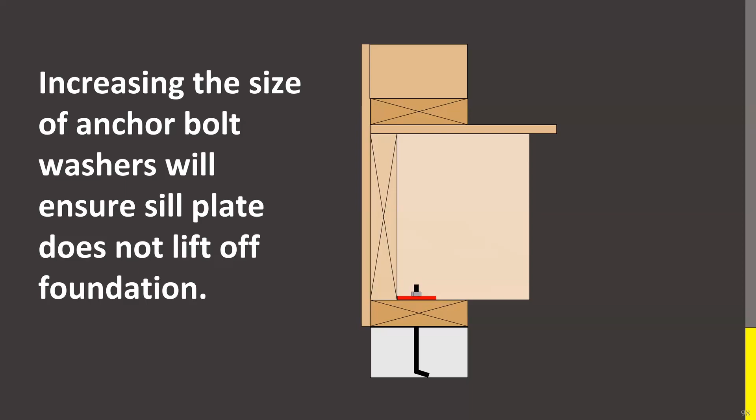So I have 8, 9, and 10 coming up in rapid succession here. We're almost done my part. So 8 is making sure that the roof covering keeps the building dry. So S520 talks about shingles, making sure they're hurricane resistant shingles, which, as I understand, are readily available in Canada, high wind resistant shingles. But it also talks about a better underlayment, and it gives several options.

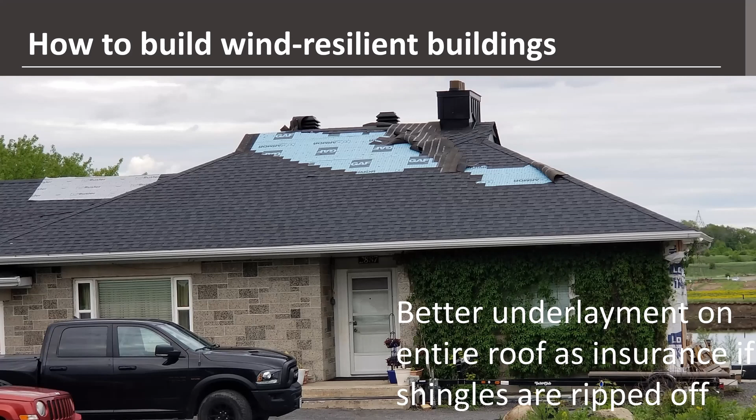And that's what I really liked about this house. Again, that's the Rideau behind it. This was last week near my house. And although the shingles failed, the beauty of it is that the underlayment is still there. And so the homeowners, I'm sure, were pretty happy that they didn't have a lot of water leaking, or any water leaking potentially. I didn't ask them, but that's something that the S520 really stresses. Keep the roof on, keep the roof sheathing on. That was number 1. Use better shingles, that's number 8. And tied to 8 is this underlayment.

Number 9 is getting into the nice to have. They're really important points, of course, and Greg pointed that out, the garage doors. Using high strength garage doors to keep large openings closed is very, very important. Now, the pressures that we use for the rest of the building assume that the garage doors are punched out, only because we don't have readily available garage doors. But if you can get garage doors that are high strength, commonly available in the United States, rated doors they call them, then you're going to save your garage and a lot of other headaches and just have an extra sense of redundancy for your house.

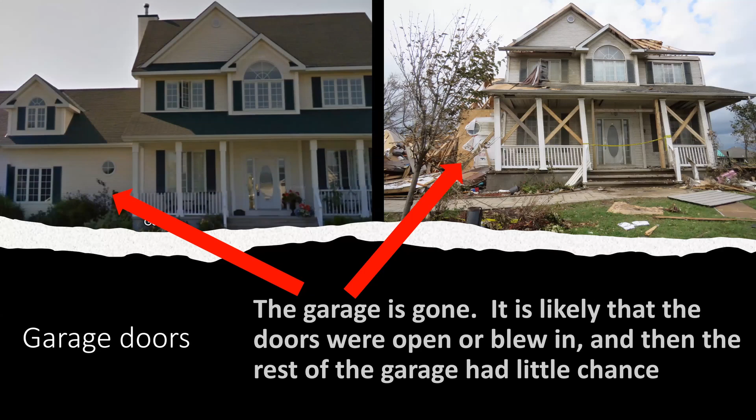Here's a Google map again of the same house I showed earlier. The arrow's pointing to a garage, but when we saw it, there was no more garage. And we feel that in this case, the garage doors were either left open or punched open. They blew in, and that caused the rest of the garage to be susceptible. And so then that whole garage had little chance of survival.

So that's what the house looked like. I'm sure that was a write-off because it's also leaning and the windows are out and the roof is off as well. So that's likely a write-off. Again, keeping the garage intact.

And now 10 of 10, using high wind resistant windows. Of course, this is perhaps a challenge. It's more expensive to get high wind resistant windows, more common in places like Florida. But the reason it's important, and if you can get it, it's really good, is along the same principle as the garage. If you have larger shattered windows, then you introduce wind into the building and it causes a lot of issues.

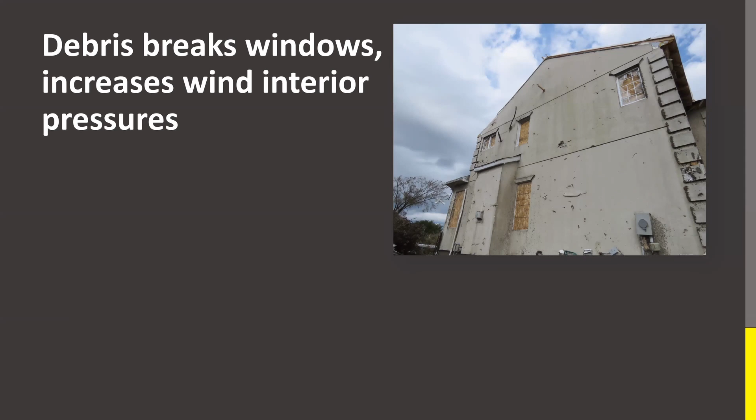So usually the debris that hits the wall, unless you're standing right there, you have a problem. But usually the debris that hits the wall doesn't really matter. There's not a whole pile of added wind pressure, but when it hits the window and shatters, the larger the window, the more wind pressure that gets into the house, and the more trouble you're in.

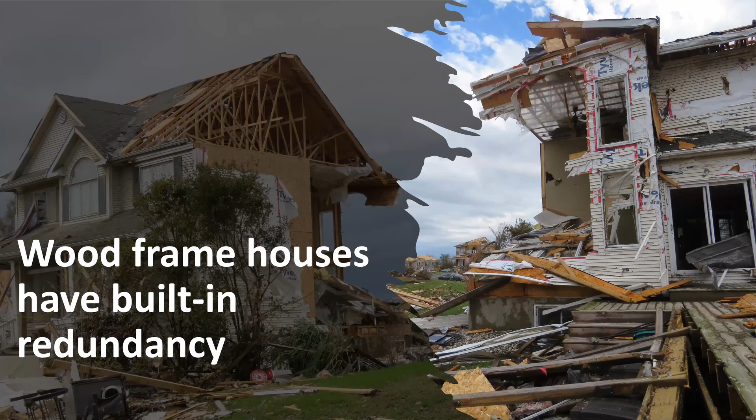So I'm wrapping up here. It's not all doom and gloom. We saw this house, we didn't venture into it. However, there's a lot of redundancy in wood frame buildings. And this one was an example of that, standing stoically here with seemingly no load-bearing walls where you would otherwise design load-bearing walls to be. But there is some redundancy, but I think we can improve that a little bit.

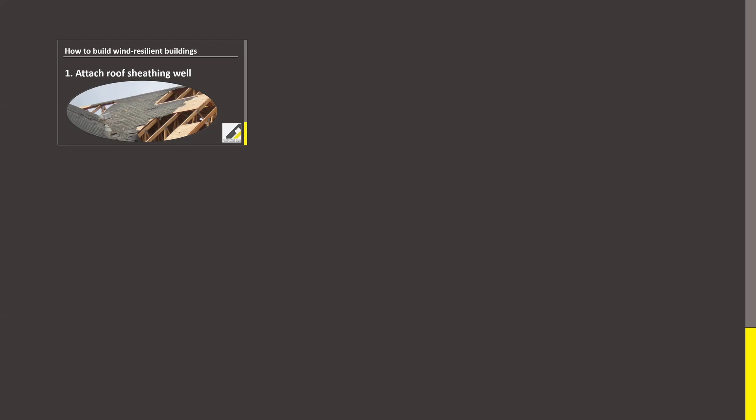So today what I talked about was attaching the roof sheathing well based on the concepts of CSA S520 as being very important. We talked about beefing up the gable ends, high wind pressures up there. We talked about connecting the upper framing and the components to the lower framing robustly. And I showed the example of the chimney and the dormers that had popped off. We also talked about ensuring that the wall sheathing is adequately attached to resist the suction and the lateral movement. Those two are related, making sure there's enough sheathing to resist those sideways wind pressures.

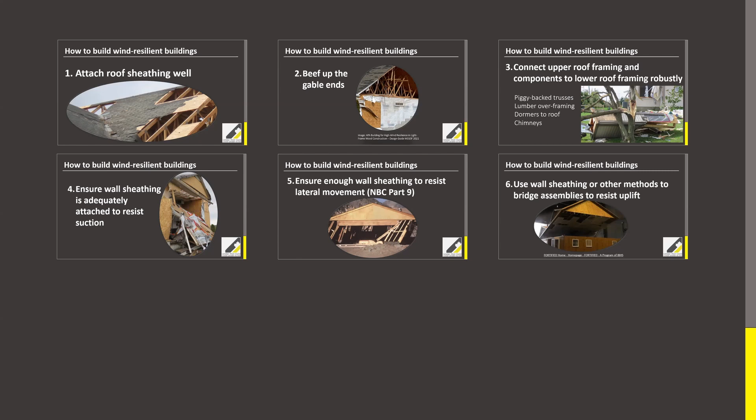We also talked about making sure the roof doesn't lift off, and that we have a continuous load path. So 6 and 7 are very related. 7 is kind of a full building perspective, making sure you have all of those assemblies connected together. And remember, Michael talked about that too. He said there were 8, I think, points where you need to make sure they're connected. Well, this S520 standard deals with those particular connections. So making sure you have that load path, making sure that you have roof coverings that keep the building dry.

And we just talked about that minutes ago, where we said use high wind resistant shingles, and maybe even more importantly, make sure you have a very robust undercovering, something that perhaps is sticky and sticks to the roof sheathing below it, is one way I would like to do it if I'm building my own house. And then we talked about the openings, garage door openings and window openings. And we said, let's make sure that if possible, it's nice to have those windows and garage doors with a little bit higher strength than the lowest grade that's possible.

So in summary, I think with a little bit of attention to details, houses and buildings can be more resilient than the minimum building code currently permits. So thank you.

That's my presentation, Keith. Awesome. Thank you so much, Robert. Gentlemen, those were great talks. I'm going to keep a recording of this presentation for my own later reference. I really appreciate it.

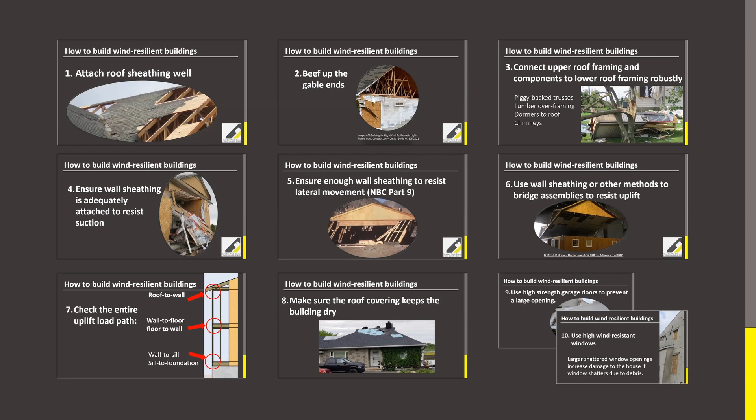Let me direct a question to Michael. I'm an engineer. Greg's an engineer. We're all full of ideas about how to make buildings better and stronger and safer, et cetera. And building officials sort of stand between us engineers who always want to make buildings better, and developers who have economic considerations to think about. Should we always have been building better, or what's your perspective on the tension between safety or reliability and affordability?

Well, it certainly is a tension, and they're opposing perspectives. So when we're trying to find a solution for this, we need to consider all those opposing perspectives. So what we've presented here is a scientific approach where we're saying we know what these loads are. We can see what it does to these buildings. We know that we can fix it. So why don't we do that? Well, one of the reasons why we don't do that is a cost consideration.